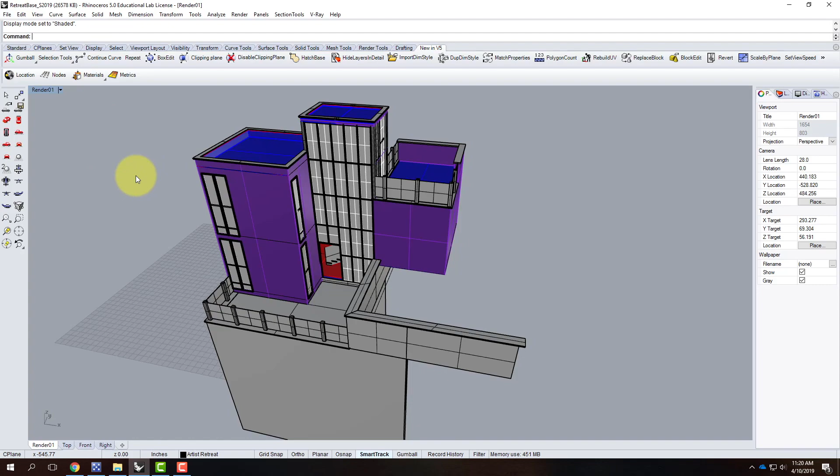So I have my retreat base file here and I've started working on it. I've done this project so that it sits kind of on the side of the hill a little bit, and we're going to think about how this integrates into the building site.

So I have this one ready. I probably could use a little bit more work on my layers, making sure they're nice and clean, but I have attempted to already organize my layers just a bit. I have a master layer called the Artist Retreat, then underneath it I have a variety of other layers, including a default layer, blocks layer, and then interior, exterior, landscape.

This is a window, I think. The pools are turned off. I'll do the pool later on because you always want to know how to render water, so I'll end up doing that a little bit later on. And I should make sure that fountain is off. And I have a construction layer that's just something for me to work on.

So I have spent some time, I've tried to organize it a little bit so it's not too out of hand, and I've gone ahead and I've saved this file.

The next piece is actually creating the site to bring this into. So I'm going to go ahead and minimize this, and I will open a new Rhino. Instead of going in Rhino and saying File Open or File New, I want to keep them both open at the same time, so I'm going to open a brand new Rhino. It's going to be large object inches as my template.

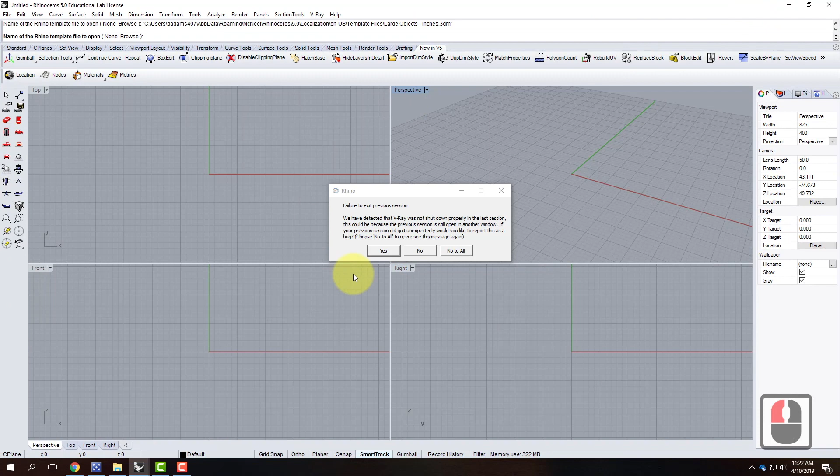At this point, I want to bring in that site information. So I could go into SketchUp and get it, or I could use the site SketchUp file that I already gave you, so I'm going to bring that file in. And this is a bit of repetition, you guys have already done this many times. So I'll go into File and then Import, because I'm going to bring it directly into the scene.

And I will go to my flash drive here. I apologize, I have to remember where I saved this. There it is.

Okay, how many people are doing the ocean? How many people are doing the mountains? All right, so you're about 50-50. I was going to do one over the other because I have to pick right now which one to do. I'll do the ocean, and maybe I'll end up doing both so you guys can see it.

So I've gone ahead and I brought in the ocean file. There it is. Remember, this is a SketchUp mesh file that I brought in. I can delete the little person, I don't need that, and I'm going to spend a little bit of time organizing, just like I've been doing.

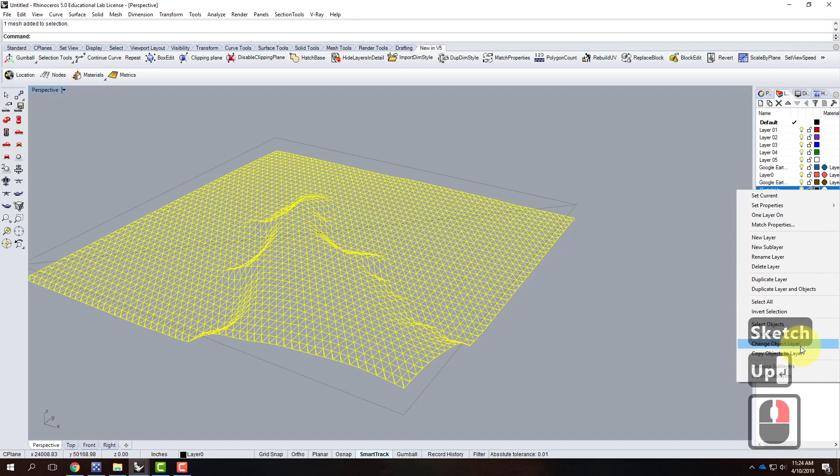I want my original SketchUp mesh to be on a layer called SketchUp, so I'll right-click and say Change Object Layer. I'm also going to keep this file, let me right-click and say Change Object Layer. The reason I want to keep that one is if I switch into rendered mode, I should see the preview of what's going on, and I might use that a little bit later on, or that material a little bit later on, so it's not a bad thing to just keep that around for later. So those are both on the SketchUp layer.

I want to create a new NURB surface because I want to smooth it out a little bit. It's not necessary that you do it, however, the building integration is going to work a lot better if you create the NURB surface ahead of time.

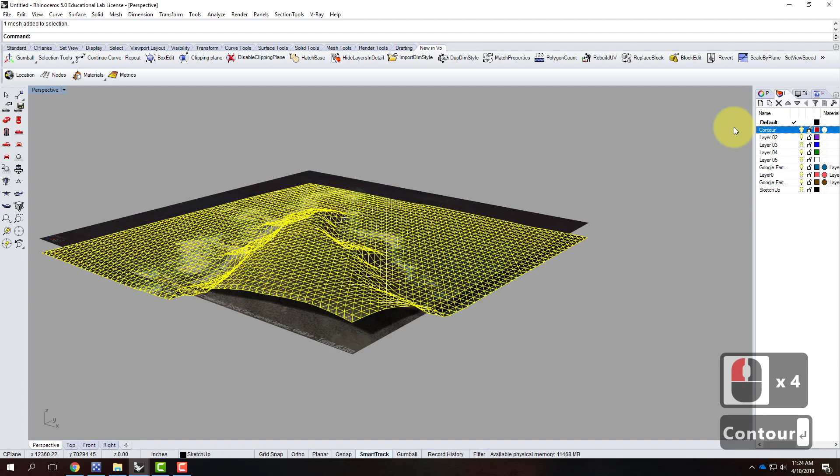So on layer 1 here, I'm going to call this Contour. I could do Contour X and Contour Y, but I'm going to do it all on one layer, I'll call it Contour XY. How about that? I have my mesh here, I'm going to type Contour.

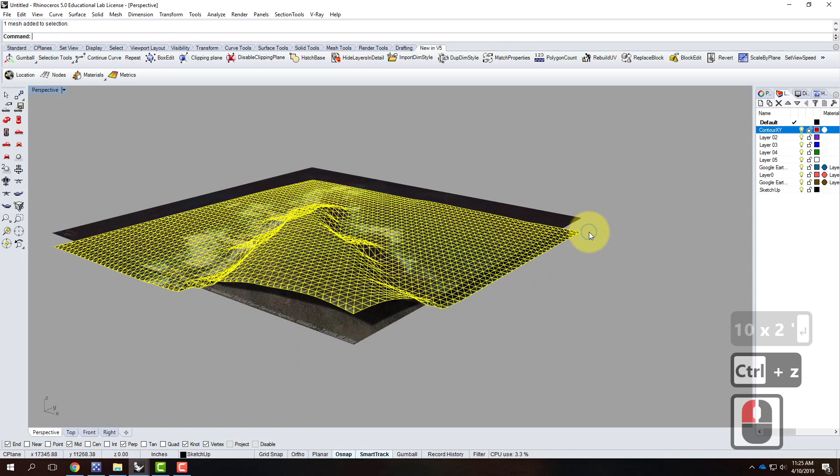I have to turn on my object snap. I'm going to do end, mid, perpendicular, and I'm also going to do knot and vertex because I'm dealing with the mesh here. And we'll do one in this direction at 100 feet. Not as accurate as I'd like, let's do it at 50 feet. There we go, a little bit better.

We'll do this one in that direction at 50 feet as well. There we go. And now I can turn off the SketchUp file altogether, and I'm left with just that mesh. We're going to do the curve network out of this, so let's look at it in the top view and clean up the edges.

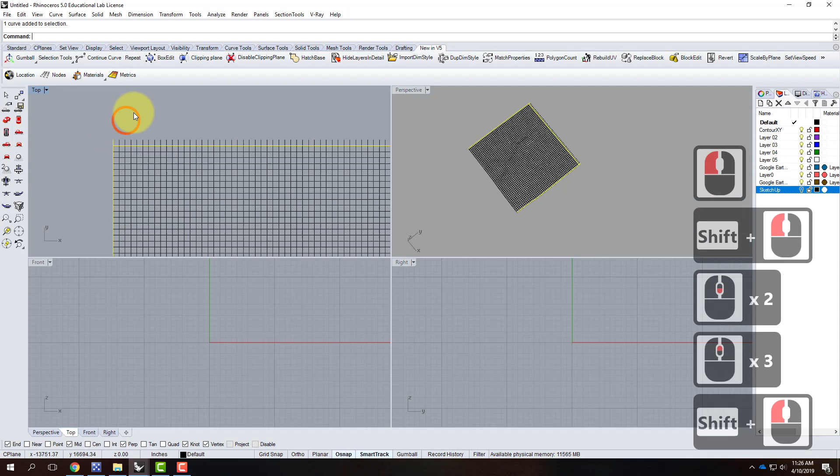So I'm going to trim and get rid of all of those pieces. Oops, too close. Let me make this a little bit bigger. It'll make the selection easier.

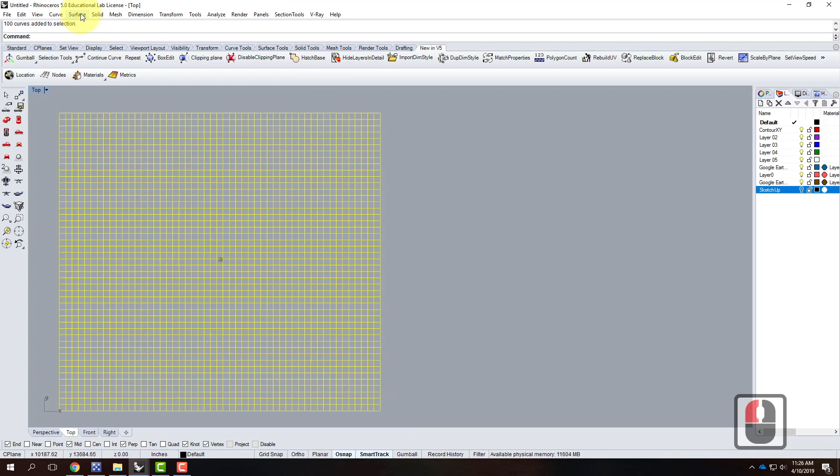All right, so I've trimmed off all those edges. Those look good. I'll now do a curve network of these curves. So I'll select them all and go up to my surface curve network, or I could type networkSRF into the command line. See if I can just skip over those. There we go.

Remember, this process tends to take a little bit of time, so bear with me.

All right, I'm going to deselect. I'll select that black object. I'll type rebuild. And remember, this is somewhere between 200 by 200 and maybe 50 by 50. I'm going to try it at 150 by 150 and see what it looks like.

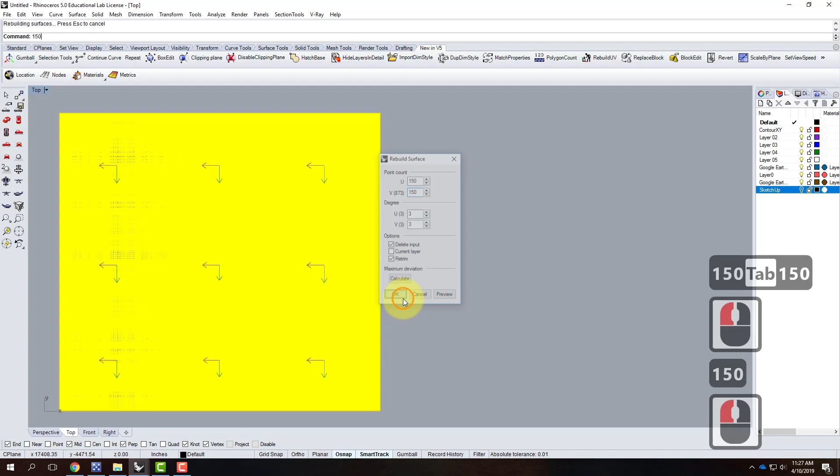And let's put it on its own layer here. And we'll call this terrain.

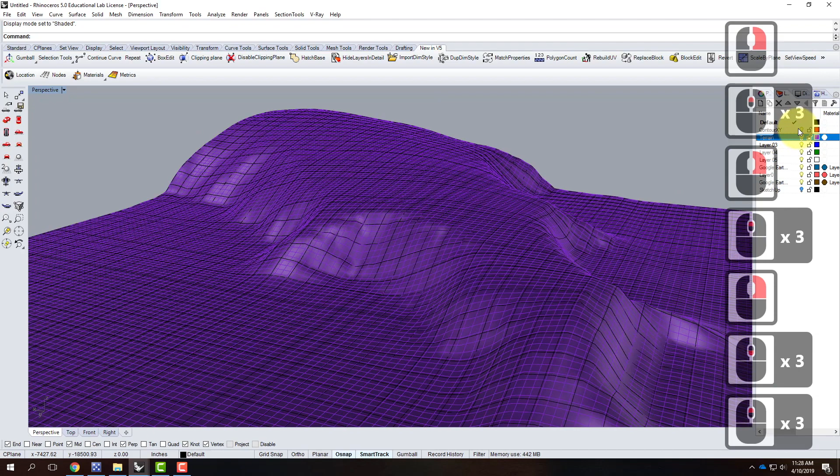I'm going to view this in shaded mode. And there it is. Let me turn off my contour XY. Oh, looks like I never actually put that on its correct layer.

All right, so if we look at this, it's reasonably smooth. Maybe 125 by 125. And I'll say OK. All right, that looks pretty good.

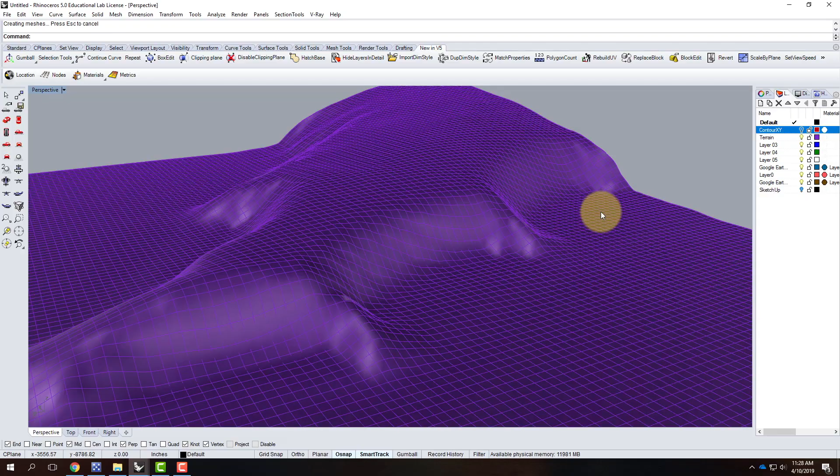So I have my terrain set up. Now it's going to be time to bring in that block of my building. And we're going to keep working with this, and I'm going to add the ocean and whatever so that we can get there. But I need to think about where my building really belongs.

And of course, being familiar with the site, I've already kind of picked out where I think the building belongs. For you guys, it may take a little bit of time to sort out where that building belongs. I'm going to try to nestle it right into about there. I could also nestle it right into about there. The orientation works pretty well.

So I'm going to go ahead and let's save this before I move on. I'm going to go to File and Save. And I have a folder set up for my artist's retreat. And this is going to be the master site. And this is the spring of 2019. And I'll go ahead and click on Save.

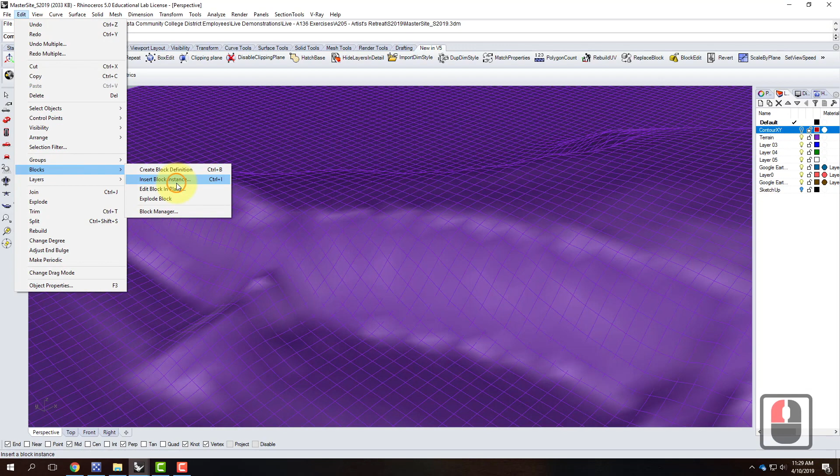There we go. Then I'll go to Edit, Blocks, Insert Block Instance. And I'm going to go find that... I need to be looking for the retreat base. I'm going to then drop that one in as a block reference.

A couple things that are important here. These are all fine, we'll go ahead and say OK. But here, we want to make sure that we're linking it and that it's a reference layer style, because we want to be able to update it and we want to make sure that it's not weighing down this file too much. So we'll go ahead and link it as a reference file. We'll go ahead and say OK.

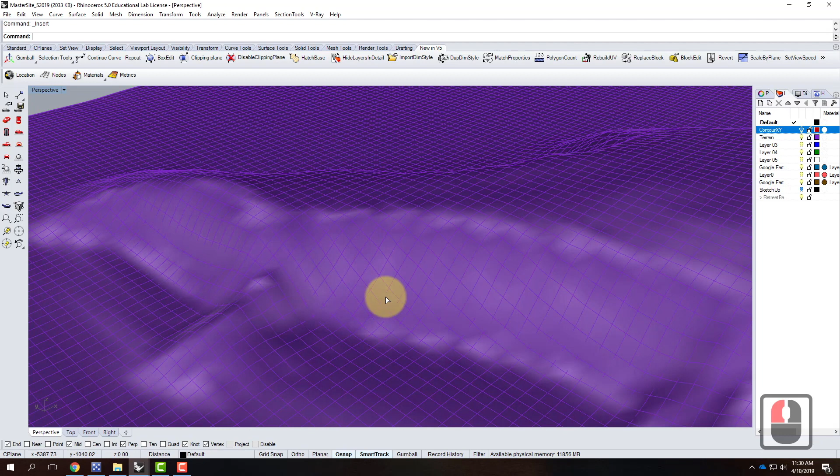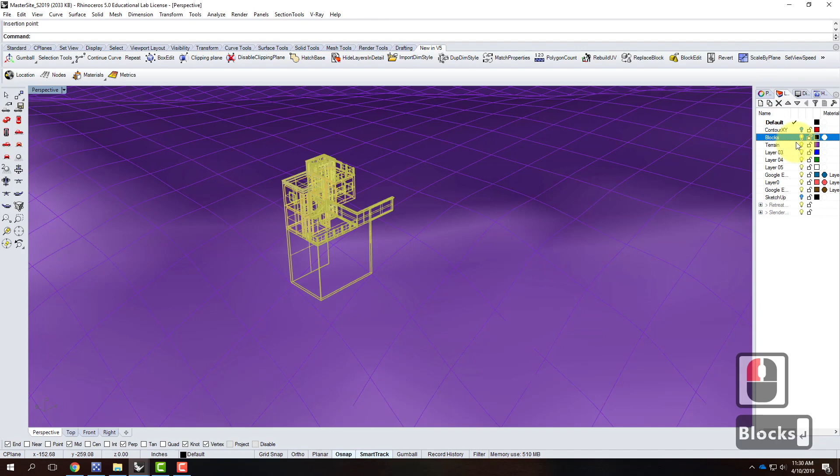We can see here that it's creating the retreat base right there. And the other thing about this is that when Rhino creates a block, so there it is, the block exists as an object independent of the objects that are contained within the block. So it doesn't hurt to give yourself a layer called blocks, and then take this object and put it on the blocks layer. That way you have control over the block.

At least I thought we did. It's just low. So we need to move this and start to manipulate it so that we can get it into our correct position. So sometimes it's better to look at it in the top view and turn the shaded mode on, because you can kind of look down and see where it sort of belongs.

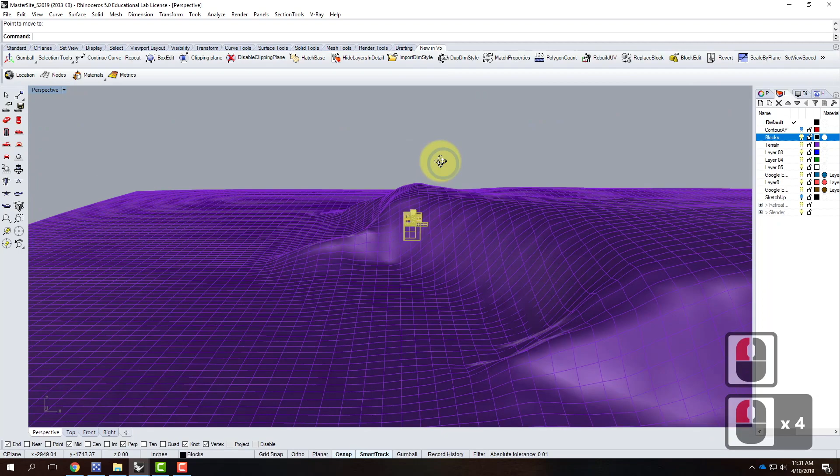I'm going to move that over. Maybe right about in there, maybe a little bit over in here, something like that from a positioning standpoint. That can be easier than trying to do it in the 3D view. Then I need to move that V for vertical, and I'm going to pull it up.

And I may have pulled it a little bit far. Move it, V for vertical. I'm going to turn off all my snaps here for a second to make it a little bit easier. And you can kind of see as I'm coming down, it's starting to integrate into the site. If I get to a certain point, right about there, okay, that's not too bad. I'm going to hit escape and look at it and say, okay, that's hitting about where I want it to.

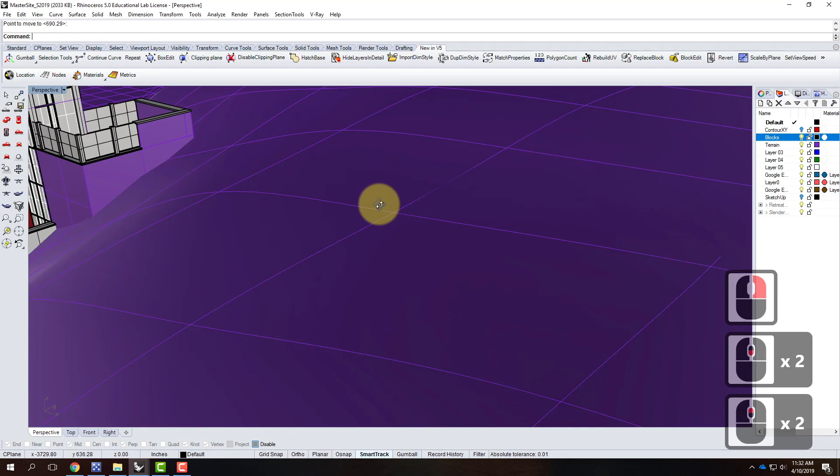I'm not intersecting any of the windows. I've got some issues, and obviously the slope is going right through the building in certain parts, but that feels pretty good. That's close to where I want it to go. This I envisioned as a little bit of a retaining wall, so I'm okay with that placement. If I zoom out a little bit, does that feel like it's about where I want it to be on the coast?

Yeah, it's about right. So now that I have the block in place here, I need to actually cut out the terrain for the block, and I also need to modify part of the terrain, like this retaining wall section here. So we'll start by cutting out the terrain.

Let me clean up my layers a little bit. We'll keep the SketchUp layer here. I'm going to get rid of all these other layers. Oh, darn Susan, she's on layer 0. I've got to get rid of her.

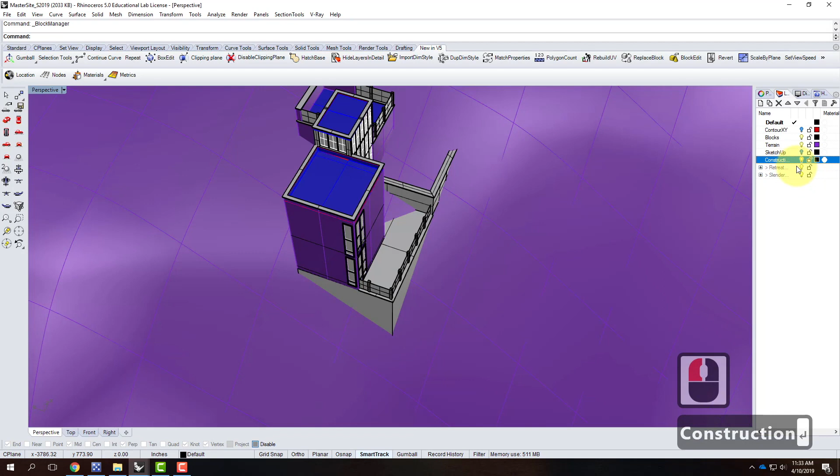We go into my block manager. Let's get rid of Susan. There you go, she's gone. Now I should be able to get rid of layer 0. There we go. Okay, and I'll give myself a construction layer. This is just a temporary layer. I could actually just keep using the default layer.

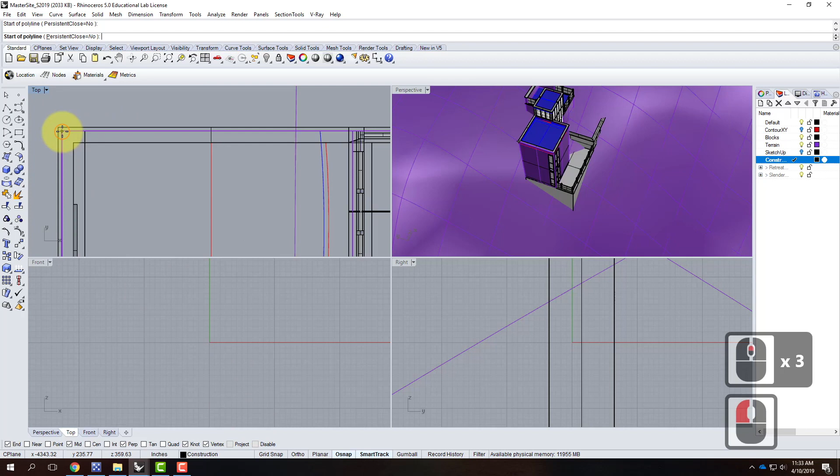And what I'm going to do is I'm going to use a polyline. In the top view, let me switch back to wireframe mode. I'm going to trace over the outline of my building. So I'll start, let me turn back on my snaps here, and I'll start there, and I'll work my way around the building. My walls are the purple lines, so I can use that to my advantage because I can trace right over the purple.

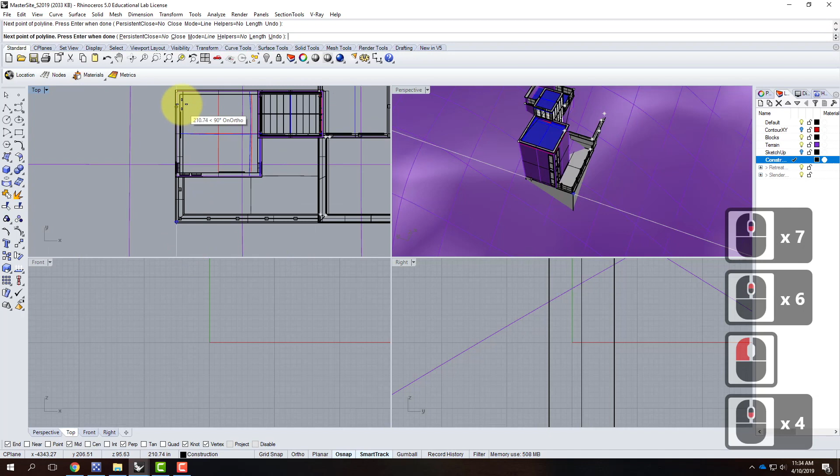But I do want it to accommodate this. Go that to right about there. Whoops. All right, and then I'll go ahead and type C to close it, and I've now created a curve that is the outline of my building. So if I look down on it there, it's not the most accurate because it goes up and down and whatever, but it's still the outline of my building.

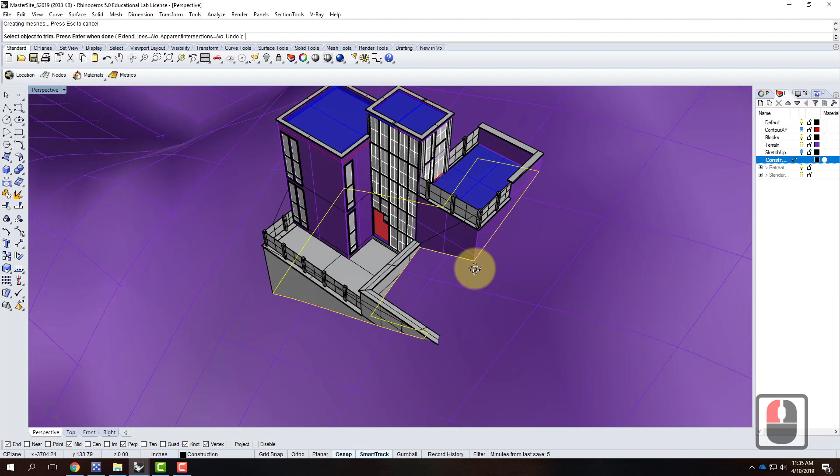So if I work on it in the top view, and I type project, and I project that line onto my surface right here, it creates a perfect outline for what I need to cut out of the terrain. So we'll go ahead and use the trim tool now to remove that part of the building. I was careful and I didn't remove too much of the terrain back over in here because I wasn't quite sure where that was going to end, and I didn't want to cut out too much up here.

So it's now in the building. If I were to jump inside the building here, I don't have terrain running through my building, so that's good. It's sunk in the correct way, but I'd like to integrate this part of the building just a little bit better into that hillside. I envision this flattening out just a little bit. So we'll take a little bit more to adjust it.

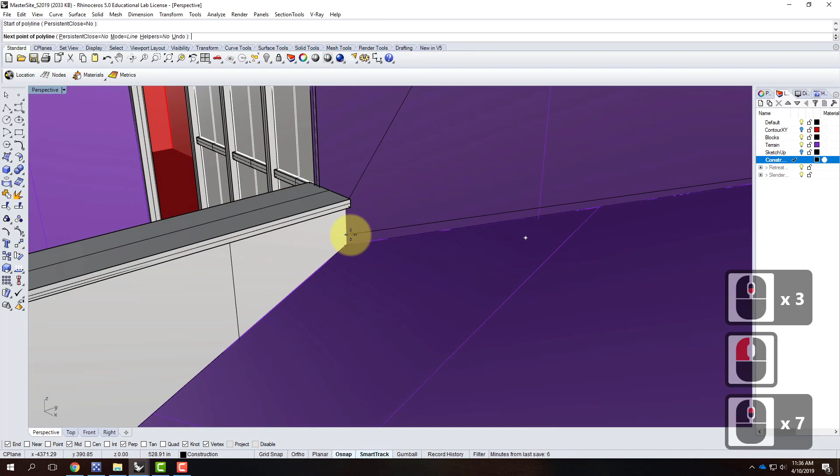And I'm going to start here, and I'm going to go to right there. Ideally, I would go down about 4 feet. And maybe I'll draw that in first. Let me start right there. And I'm going to type 4 feet.

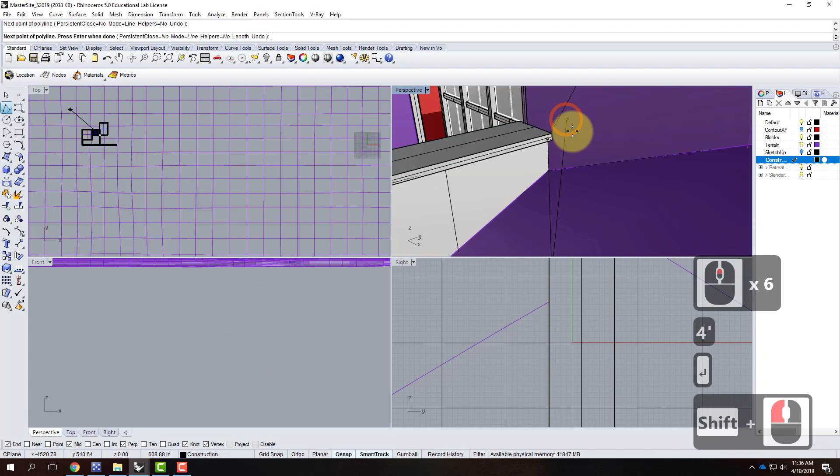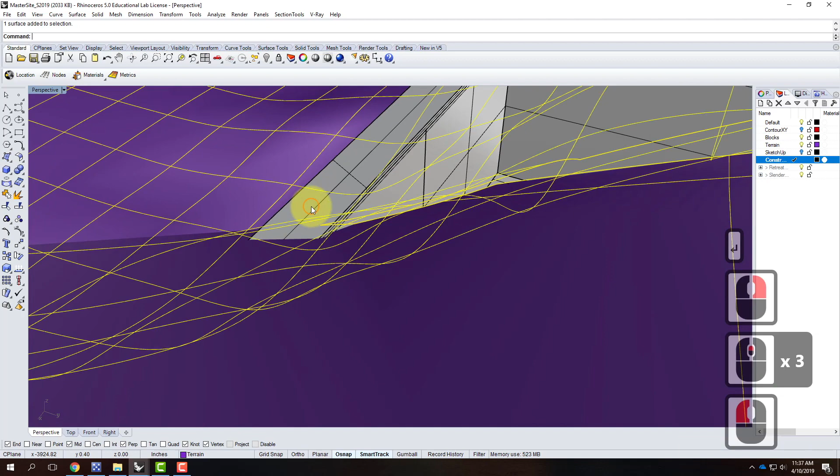All that's doing is it's giving me a reference point for where I want the terrain to fall eventually. And so we'll go ahead and go from here to there. And I'd like to know where this surface intersects with my wall. It's obviously intersecting. Actually, better yet, I'd like to know where this intersects with my wall. So I'm going to take this curve and this surface, and I'm going to type intersect.

And it's going to give me a point where the two intersect. I can then draw a line from that point. I turn on point snap there, up to that point right there.

This line here doesn't follow the surface. It's close, but not quite. So I'm going to need to project that onto the surface. So I'll come back here and type project onto that surface. And there it is.

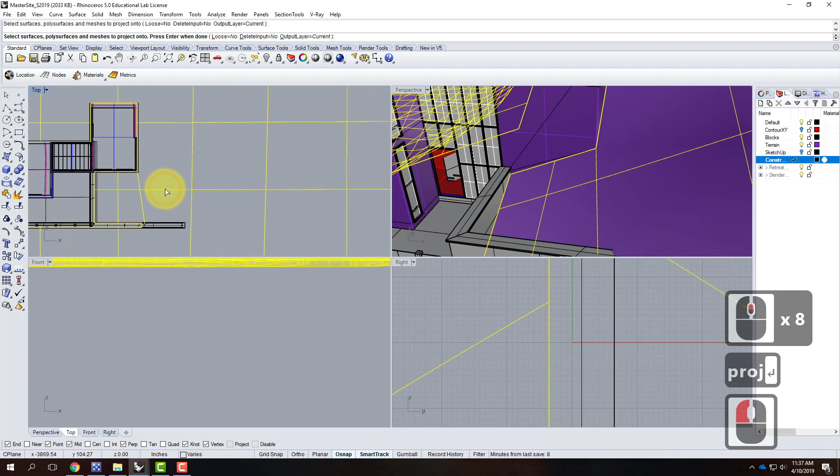So this line plus that line plus this line there are close to what I need for a curve network to create this little bit of surface. I need to do a little bit of modification. Let me go to trim and get rid of that extra piece of the line.

Nope. Do it from underneath. Get rid of that extra piece of the line. I also need to get rid of that little stub piece right there. OK, I'll hit enter to finish, explode.

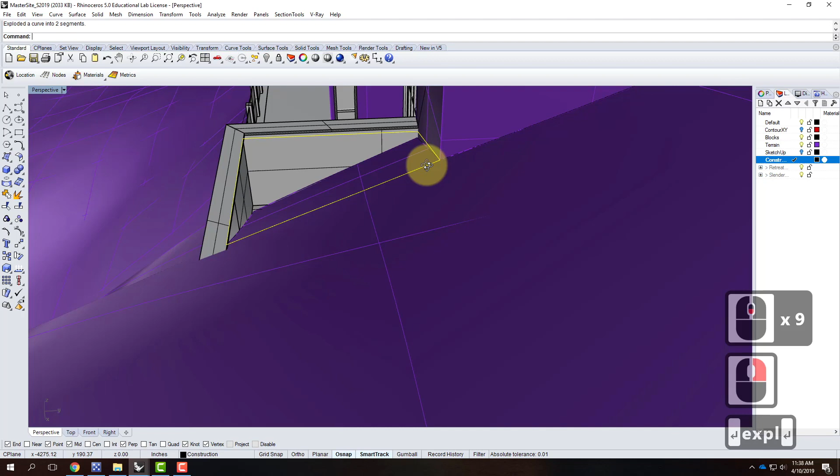So there's 4 separate line segments. And then I can go up to the surface curve network. And that's going to build that piece of the surface. It's going to match in perfectly with this edge, because I made the transition along that edge. And then I flatten it out to fill in that piece of the surface there.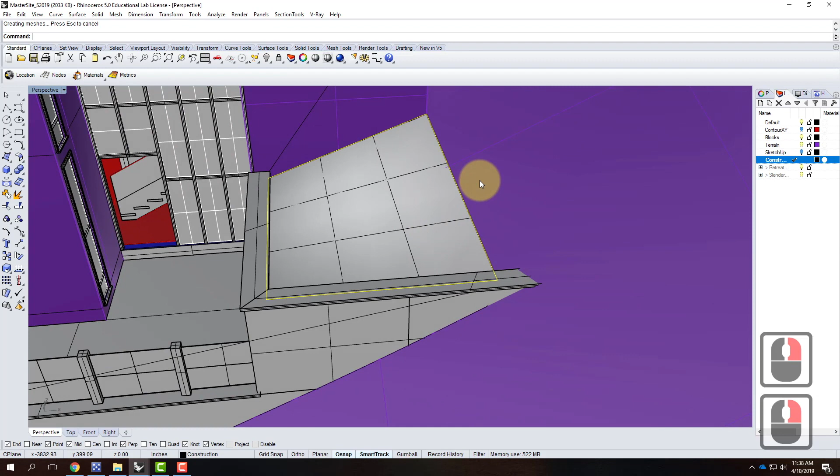If I wanted to, I could actually trim off the purple surface that's underneath. Right now I have redundant purple surface there. I can go into the top view. I can project down onto the purple surface.

And then I could trim that piece of the purple surface away. Like that. It doesn't really matter, except that now I can take these 2 pieces and actually join them together, which can help in the texture mapping a little bit.

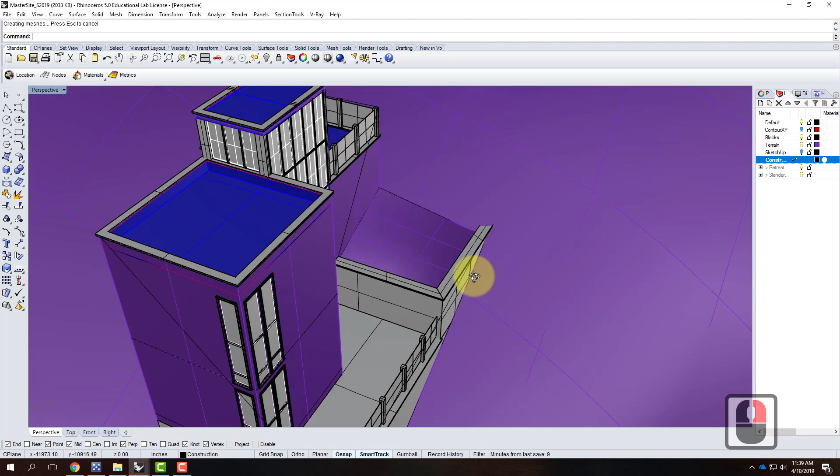So I've just made that little bit of a modification to allow those to flow in together. And basically, this is starting to feel like it belongs in the scene as part of the site. So that's good. So I have this in. This is still all a block reference. So I haven't done anything.

Now, for me, obviously, I've pulled this into the site before. I've spent some time figuring it out. When you go to pull yours in, you may find that you need bigger foundation to be able to put this one in. Or a retaining wall might need to get longer.

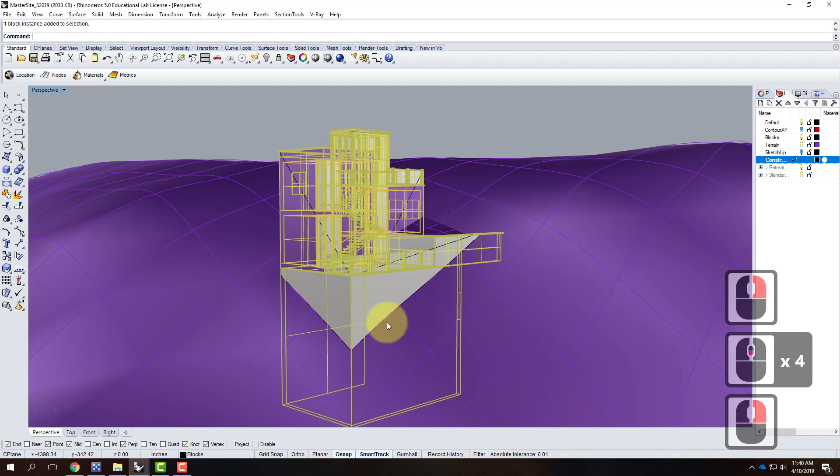Now, if you're working up on the top of the site where it's relatively flat, you don't have to do too much. But you're still going to have to work a little bit with the foundation. So if you find that something wasn't quite long enough, you see that I made the foundation way more than deep enough as it goes through. But if it wasn't quite deep enough, you can jump back over into this file and you can make modifications.

So let's say that, hold on, I have to turn on my object snap here. For argument's sake, let's say that I hadn't done this before and that my foundation wasn't big enough. I'll save this.

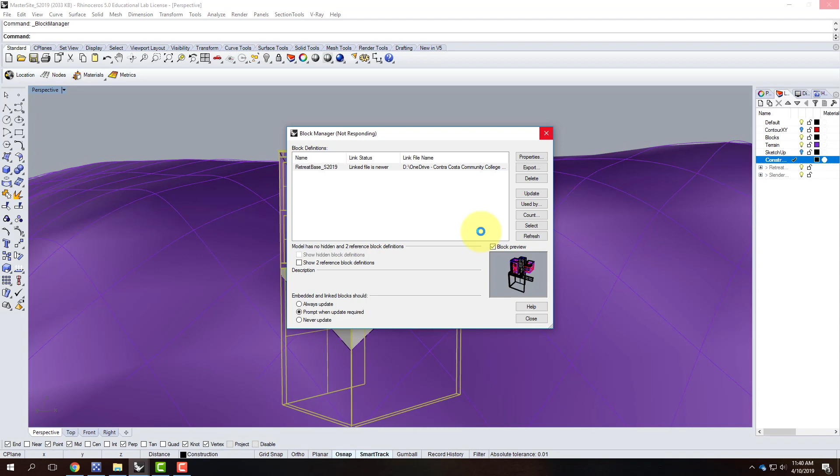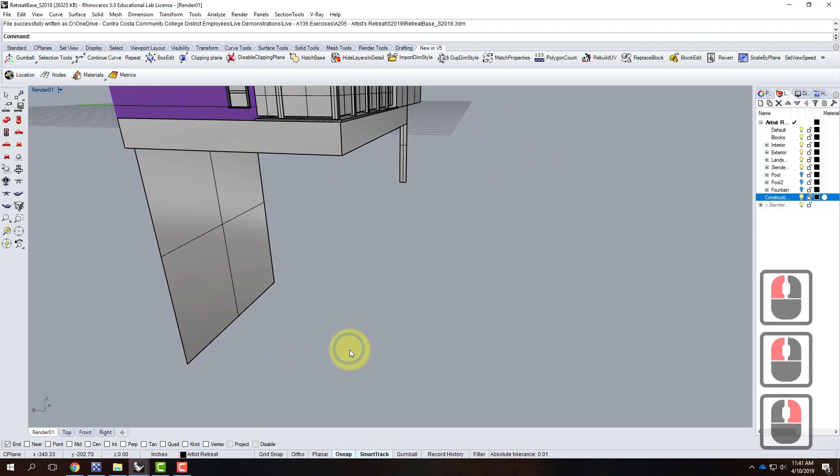Hold on a second, has to update. Okay, so there it is. I didn't have it extended down far enough, and I needed that to extend. In this scenario, I would go back to my file here, and I would extend that piece of foundation down so that it would more than be enough to go through my scene.

So let me go ahead and scale 1D on it. And I'll drop this one down so that's more than enough, and I'll go to File and then Save. I can then jump back over into this file, and I can update my block, Edit, Blocks, Block Manager, and we can go ahead and update that file.

So that's how to add the building and site integration. That's step or part 1 and part 2. Part 3 talks about exterior geometry. That's essentially what I was just doing, where I need this retaining wall to be a little bit longer. I need something to be stretched a little bit. Those are the modifications that you're going to need.

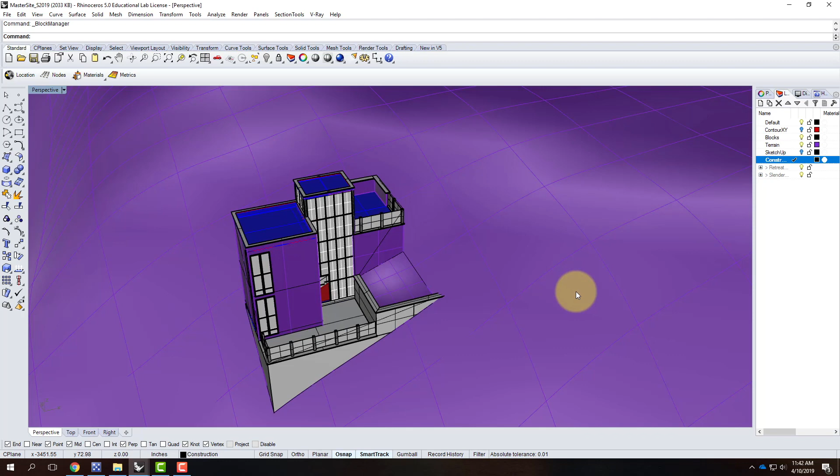Buildings always have foundations, and ground is never perfectly flat. It's just the way life is. There's always a slope to any site. So that being said, you're going to have to make a few modifications. Give yourself a little bit of extra space, extra depth where necessary.

Okay, so the next part is starting to establish where are the views going to be? Where do I want to make my renderings? And so as I'm looking at this particular building, doing a rendering from back here, looking at that, it's not the most exciting part of my building. The truth is, the fun part of my building is looking toward this side. So as I start to establish my view, I'm going to want to set up a rendering that's somewhere in that neighborhood. Now, when we start talking about views, we might want to get a little bit more specific.

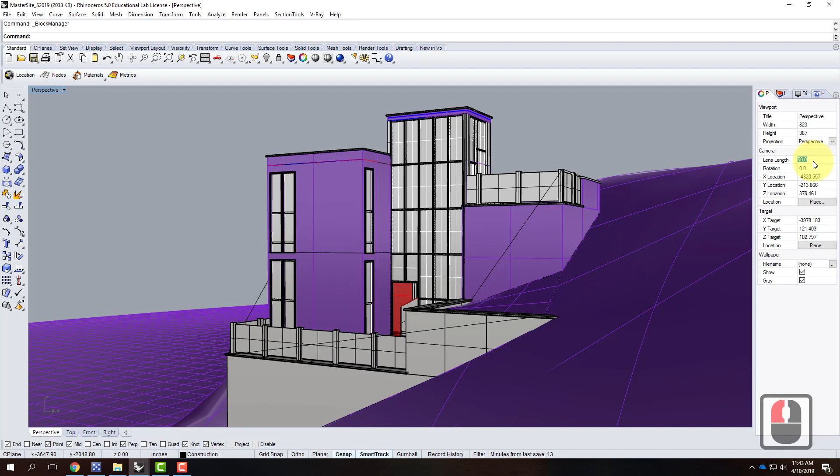In this scenario, the default view is a 50mm camera lens, which is kind of a telephoto lens. We're not going to get too much distortion around the edges, but we're also not going to get too wide of a view. If nothing is selected in my master site file, I can go to Properties and look under Camera, and it tells me the lens length is currently at 50. I can change that lens length down to make it a little wider, say maybe 28, and this is going to feel a little more dramatic. It's a subtle change, but it's a little bit of a different change.

If you go to do an interior rendering, which we're going to do, you might even switch it all the way down to like an 18, which is really wide. You can see it there at 18, it starts to distort pieces of the building. We could go even wider than that, down to maybe 10, and it's going to be real distorted when we start to get in close. That's going to work nicely for an interior rendering.

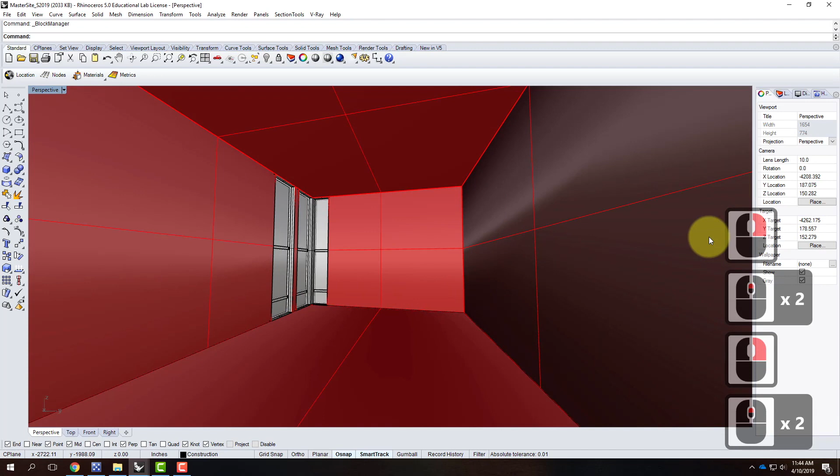If I jumped inside and wanted to see everything going on in a particular room, you're going to want a wider angle. Even 10 is a little bit much for me. I tend to stick to about 18 for an interior.

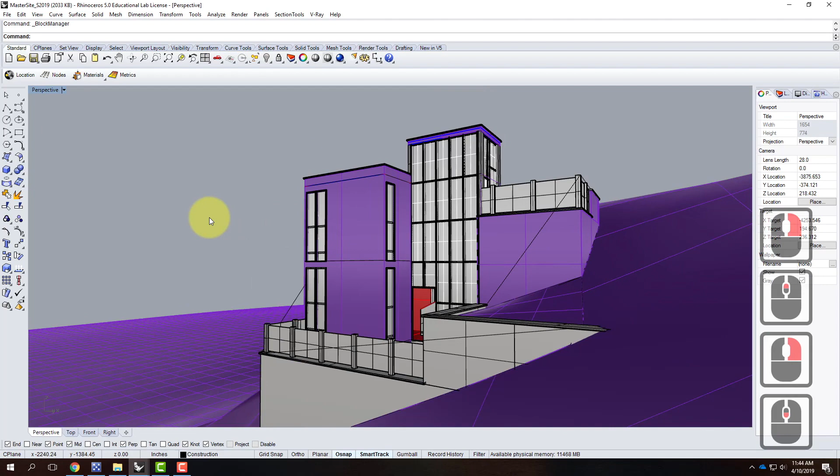So when we jump outside, though, I think 28 is not too bad. So I'm going to go to 28, and then I'm going to start to really align my view, and start to feel like, okay, I'm liking this. Maybe I want it to be a little bit more like that.

Remember, I can use the pan tool as well if I start to think, okay, I want to cut that part of my building off. I want to look that way because all I want to see is ocean out here and a little bit of grass right there.

Okay, maybe this is the right view. Do I like having this part of the building cut off? Not really. Let me pan and pull that down ever so slightly. There you go, I'm feeling like I've got this set up. This is the way I want it. The angle's right. This is going to be a good rendering.

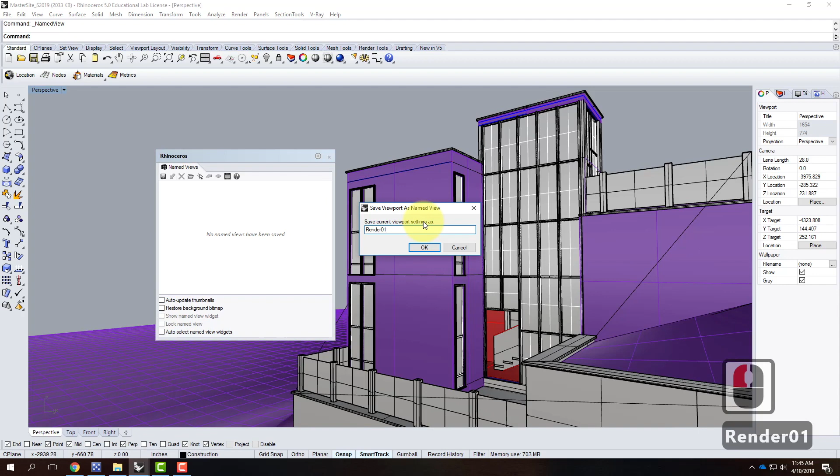Now it's time to save that rendering. We've done this a little bit before, but I'm going to emphasize this even more now. We're going to go to the downward facing triangle and go to Set View, Named Views. Before I ever perform a rendering, I want to save the view. So this is going to be Render 1. I'd encourage you not to put any spaces in these names, so keep it without spaces. I'm going to call this one Render 1. It could be Exterior Render 1 or something along those lines.

The advantage of saving these rendered views is you can keep modifying and then jump back to the exact view and do the same rendering. You don't have to waste time finding that render view anymore. So I have that view established.

I might also spend some time and play around with a few other views. Maybe I want to be as if I'm standing on top of the hill looking down at the building. Maybe that's a view I want to try to see, or look at it more. Yeah, maybe it needs to be looking down on the building, something like that.

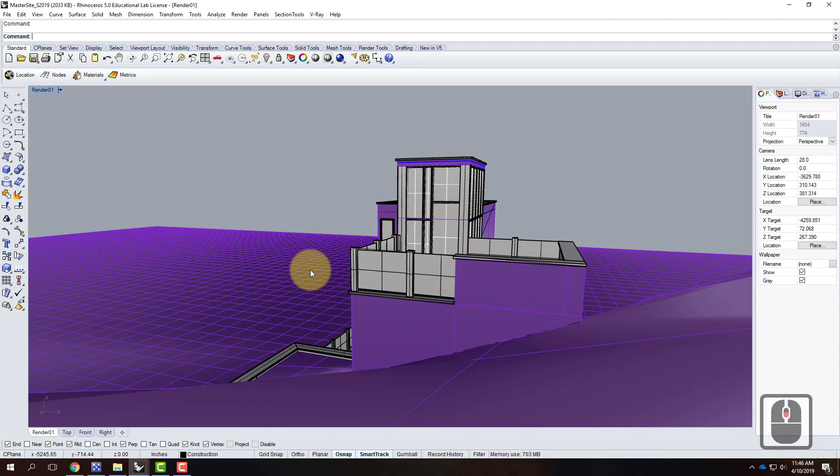We can get more technical if we want, in that we can show the camera itself. I can click on this downward facing arrow, go to Set Camera, and turn on the Show Camera icon here. Now when I do that, nothing happens in this view, but the camera shows up in all the other views. So you can actually see the placement of the camera itself, and you can see the target, which is the middle one, as to what it's looking at.

If I were to move that camera point, let me type move here. See how the camera angle changes in the render 1 view? I can manipulate the camera independent of the view. I can zoom, pan, and dolly inside the view itself, but I can also manipulate the target of the camera in an external view.

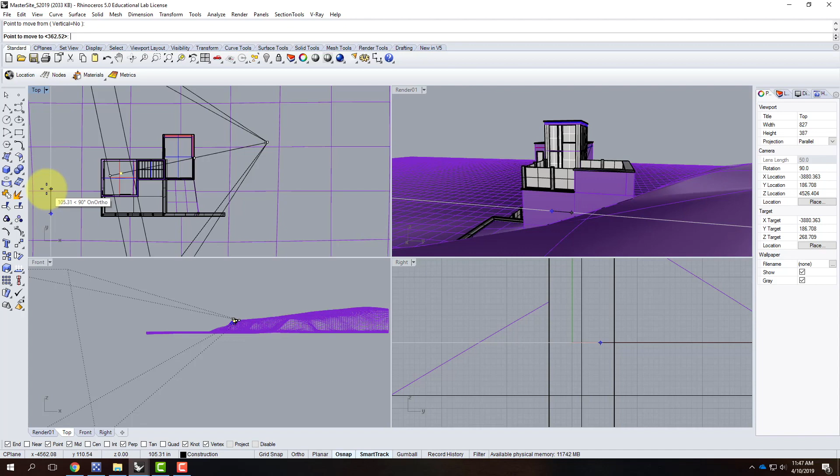Frequently you'll end up doing this. We'll do this more in depth when we do the interior, because we're going to set the height of the camera to eye level so we're looking at it in the correct orientation. So this might be my render 2 view, for example, in which case I go to the little downward triangle, go to set view, named views, and this would become render 2.

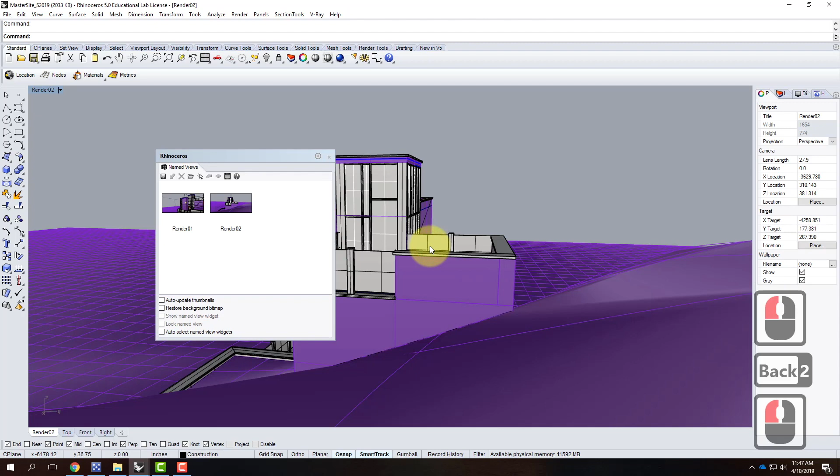I strongly encourage you to save these rendered views, because then you can go back and re-render as you make modifications. You change the texture mapping, you go back and re-render. Change the lighting settings, you go back and re-render. Once you have those views, it makes it really easy.

So that's setting up the ideal view. The next part, part 5, is setting up the HDRI environment for your file. Remember, we did that, we have to do that one again. At this point in the semester, I'm not expecting you to do it completely from scratch. I taught you that part of it, but we can use the presets. If you go to V-Ray Resources and then the V-Ray Quick Rendering Setups, you could use any one of these.

When you're doing your renderings, the day scenes are the day scenes. The sunsets and the nights are kind of the same. You could argue that if it's a sunset but the sun's above the horizon, it's a day view, and if it's below the horizon, it's a night view. Making your arguments for you - anyway, you guys can figure it out. Stay away from the night views right now.

I'm going to use the Malibu Overlook view because it has an ocean in it, which is particularly useful in this view. I think I'll flip over and do the Tahoe another day so you guys can see me work on both files. Anyway, I'm going to go ahead and download this.

I already have it there. This is all the information you need. This visopt file will allow me to load it. I also have this one already downloaded. If you want to save this, right-click on it and say Save Link As, and make sure you save it as a visopt file. So let's go ahead and load that one in.

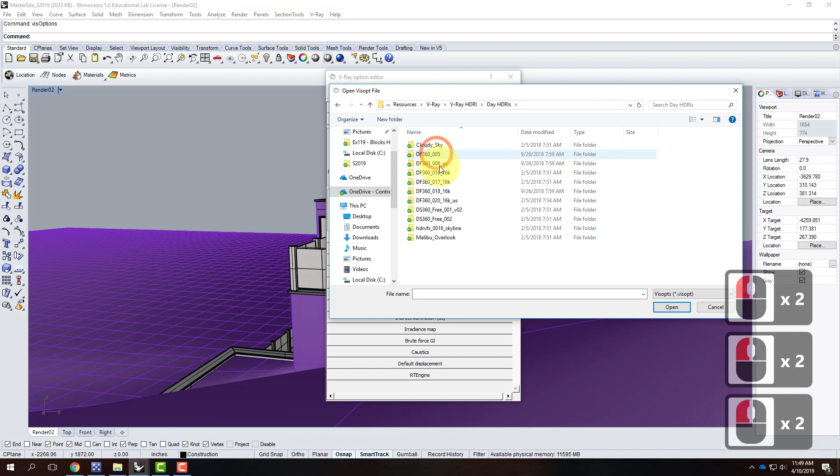I'll go into my flash drive, into my resources, into V-Ray, into my V-Ray HDRI. These are day HDRIs, and I have the Malibu Overlook and the visopt file for it. We'll say open. The reason I open one of the drawers is once it's done loading, it will close the drawer, and that way I know it's done with its load. Okay, so I have that one inserted in.

I need to double check that the settings are correct. I'll go into the GI skylight, click on the map button, and make sure this file is where it's supposed to be. Looks like it's not, so let's go into my resources, into V-Ray, HDRI - and you can see why organization is important here, so I can easily go back and find it. There's the ENV file. Let's make sure we get that.

Perfect, so those two are installed. That's good. That means I have my environment.

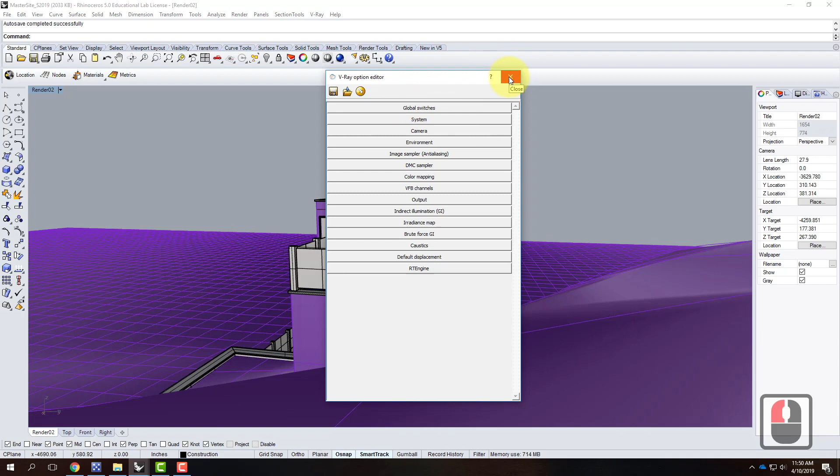I still need my sun installed. So I'm going to create a layer for environment and a sublayer for sun. There it is - I have environment, I have sun. On the sun layer, I'm going to create a V-Ray sun.

I should have loaded the V-Ray toolbars by now, so let me go ahead and load those real quick. Let me go to my toolbar layout, go to File and then Open. I have this on my flash drive for easy access. There it is. Perfect, now I can choose the V-Ray Sun right here.

We'll uncheck Manual Control, and I want this to match up with the settings that I have listed on the website. So I'll double check here: my sun settings are San Francisco on 6/15 at 2:45 with daylight savings on.

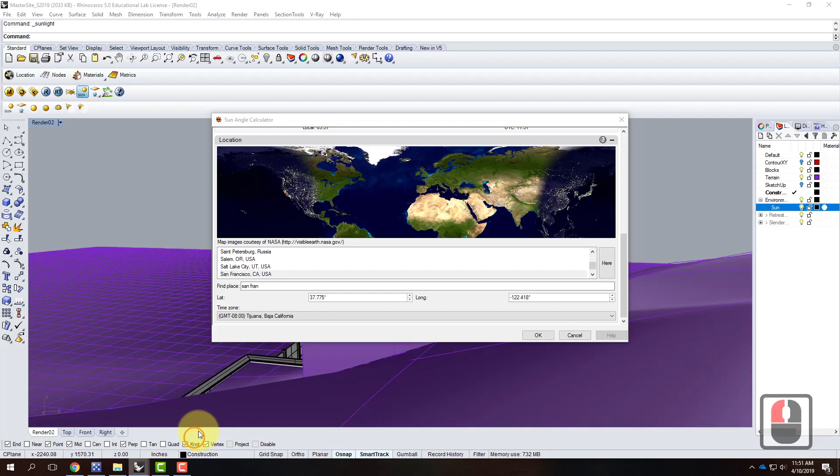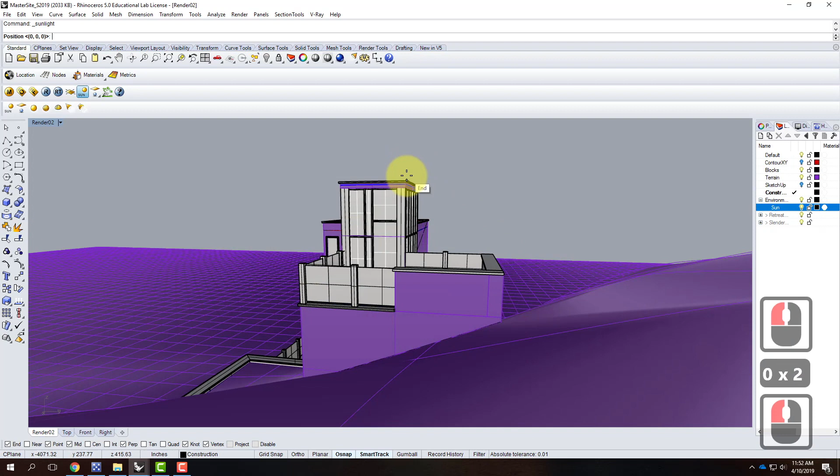So there we are. This was 6/15, daylight savings was on, and it was at 2:45. Seconds don't really matter, we'll go ahead and say OK. Remember, I have to put this into my scene. There's the sun, it's in the scene. I want to make sure it's on the sun layer, so let me change object layer. There it is, so I have the sun, I have the environment installed. I'm getting close.

Next pieces of the puzzle are obviously assigning appropriate materials and texture mapping. You guys don't need to watch me do that, I think you're well accomplished at that by now. Those materials would be assigned not in the master site, but in the retreat base. So I can flip this over into rendered mode, and we can see that the materials are ready to go on the building. Let me jump back over into the master site. So I have the materials done.

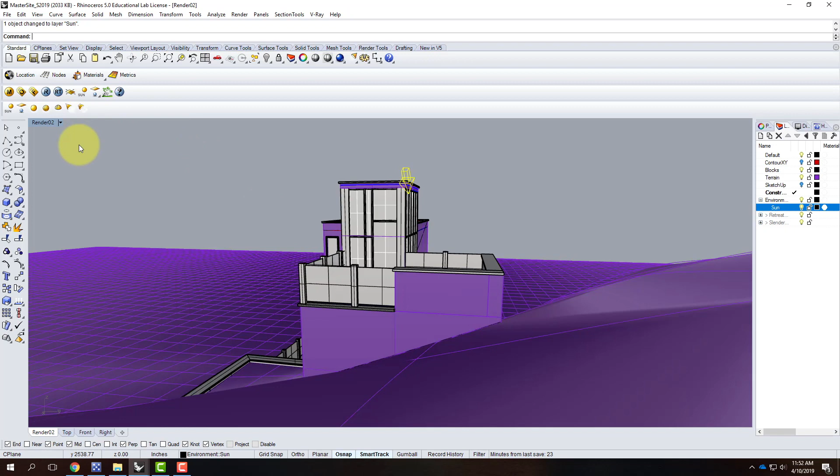The other thing that comes in here is sometimes you want extra objects that enhance the overall rendering. These are the kinds of things that, if you're proficient and good at Photoshop, you could very easily Photoshop in, and they'd probably take you a lot less time than to actually render them.

What I like to tell people about rendering is, theoretically in V-Ray you could render the perfect scene, you could have every blade of grass, you could render it perfect. That would take you, let's say, 100% of your time to do it. If you did Photoshop, you could basically spend 100% of your time in Photoshop and get a pretty good rendering. Or you could spend 50% of that time and do a combination of V-Ray and Photoshop. So you can cut down on the amount of time it takes to create the perfect rendering just by meshing Photoshop and V-Ray. This isn't a Photoshop class, so I'm not going to teach you that part. I'm going to teach you the V-Ray part, but recognize that collaging in, using the grass clone stamp and that sort of thing, is a really good strategy versus actually rendering it out.

So in this particular scene, I don't have an ocean and I don't have any grass just yet. And I'm noticing here that when I added those V-Ray toolbars, it tweaked my view just a little bit. So I'm going to go back and reset that view. Let me go to named views, I'm going to rename this one as render 1. Now, I've been very careful as I set up my view - the only piece of grass that I'm going to see is right there, and it's close up, so I can deal with that piece of grass and not the rest of the grass. So I'm being careful about how I set it up.

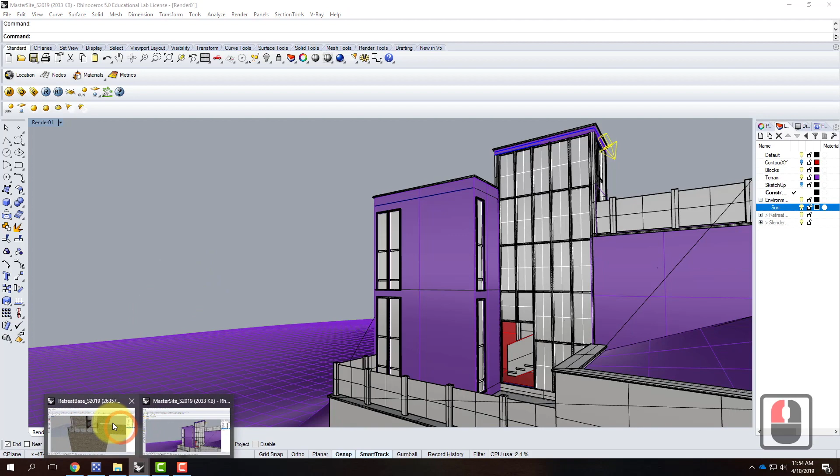I do, however, see a lot of ocean. So for you guys that are doing the ocean file, I have on the course website some stuff to help you out. If you go to Resources and go to the Rhino Blocks library, and into Landscape, these are the things I have set up for you. I have an ocean file that will bring in what I use as the ocean, and I'll show you that in just a second. I have some grass, I have some rocks. I also, for those of you working in Lake Tahoe, have a Lake Tahoe file. It's not perfect - it's hard to render the mountains of Lake Tahoe perfectly, but it's close. It's a pretty heavy file, so you'll want to bring it in as a block. So you'll have your master site, but this will come in as a block. I'll do a sample with this in it so you guys can see that as part of it.

So I need the ocean. I'll click on the ocean, I'm going to download the Ocean 3DM Rhino block - I already have. There is also an ocean material package that you'll want to have as well. Those are both available there for you to use. So now it's time to bring in that ocean. I'm going to make the blocks layer active here. I'll go to File, then Edit, Blocks, Insert Block Instance. And I need to go find the ocean file, which should be in my Resources folder inside of Rhino, Rhino Blocks, Landscape. There it is - there's the ocean.

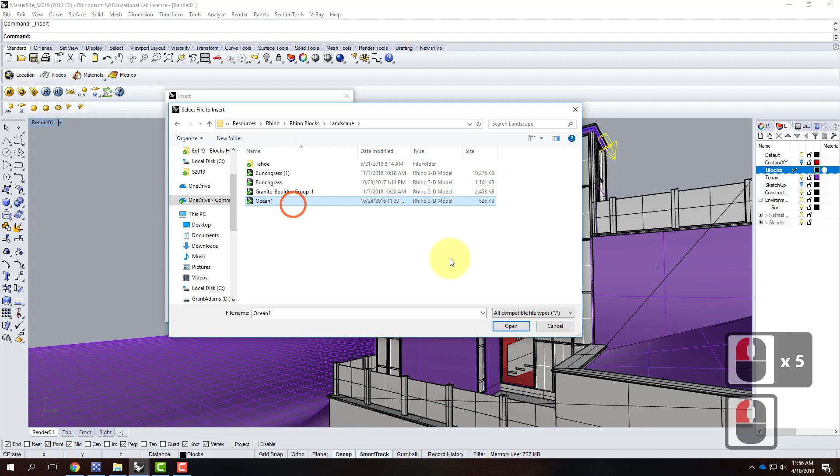And I'll go ahead and say OK. This is again going to be a link and a reference. I'll say OK, and I'll drop this file in.

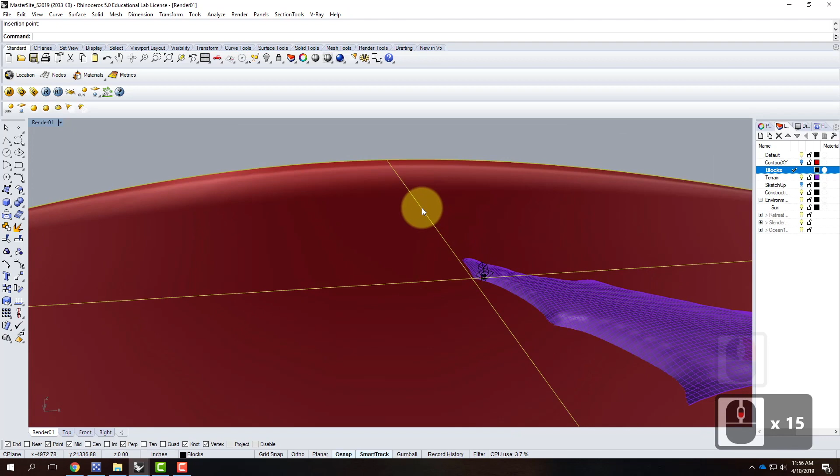What this is, because V-Ray does not support rendering infinite planes with displacement mapping on them, which would be the waves, this is a giant disk. It's kind of like a dinner plate, and it has slightly curled edges so that we can adjust where that horizon is going to be.

First thing I need to do is place it so that it falls where the coast should fall. I'm going to move it, and then V for vertical, and drop it down until it hits right about where the beach would be, right about there. So I've dropped that file in.

You'll notice that if I jump back to my render 1 view, that then provides my horizon.

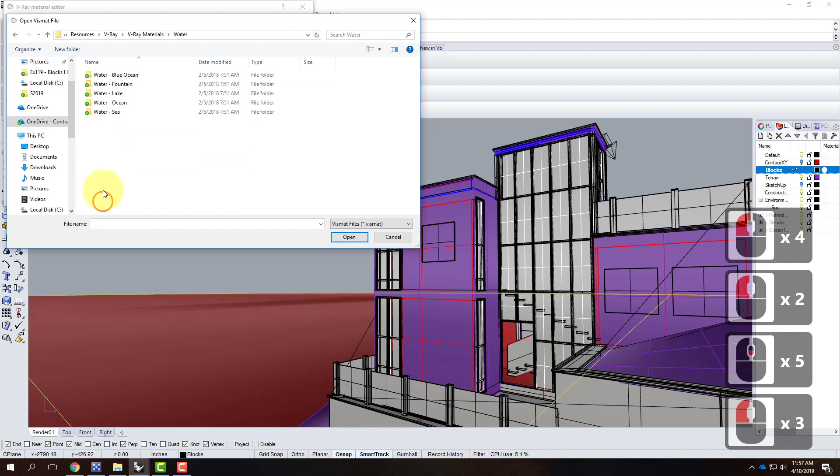I need to make sure that this has the correct material assigned to it. So let me go to V-Ray Materials and make sure my ocean is here. There it is, I'm going to preview it. It looks pretty good. I'm going to go ahead and reload the ocean just to make sure, and import the material. Perfect, all right, just making sure that that's there.

So everything's starting to get set up. If I wanted the grass to go here, the grass is another little block that comes in. It's a series of curved planes that have a grass texture applied to them. The grass is tall, kind of tall grass, and it looks pretty good if you look at it from the side. If you look at it from the top, it's going to look really lame. So looking at it from the side kind of cheats the rendering a little bit.

So I'll go to Edit, Blocks, Insert Block Instance. And there's my bunch grass. Go ahead and say OK. It's again going to be a link and a reference, and I'm going to drop it in right about there.

Adjust its placement in the top view here, and so we'll move it just a little bit.

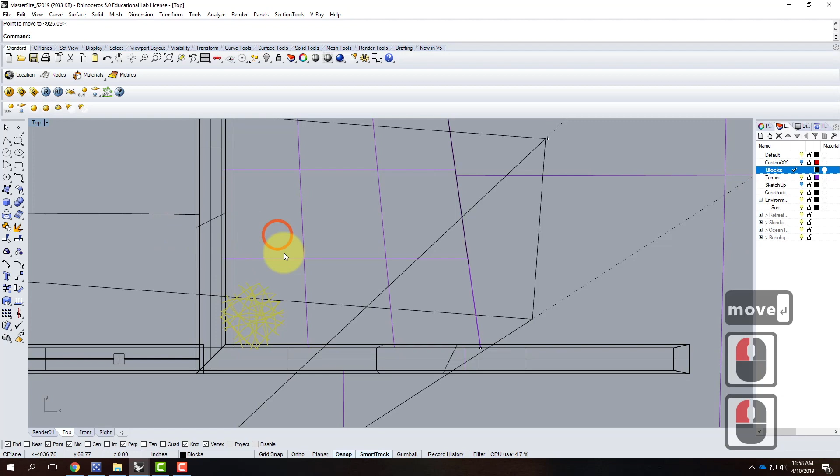Now for this to work, I need lots of them, so I could array these on a surface. Let me take this and explode it so that I have just the small piece of surface right there, and do an ArraySrf. Base point for objects on the array will go right there at the center. Reference normal for objects, it's going to be the default, I believe, so I'll just hit Enter.

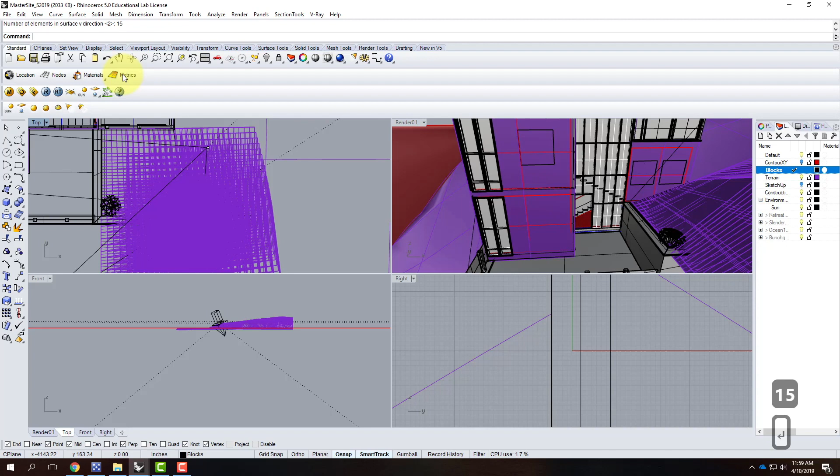Select target surface for array—there's my target surface. Number of elements in one direction, this is a guess, maybe 15. Number of elements in the other direction, let's try another 15. And that was wrong, I selected the surface instead. So let's try that one more time.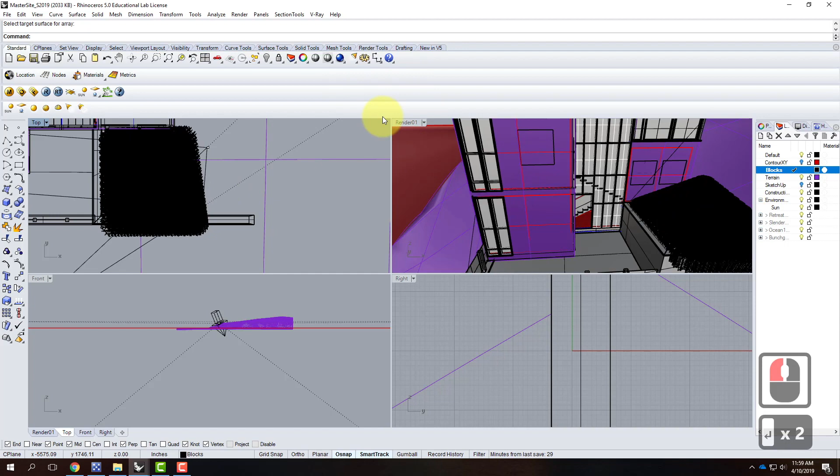Select objects to array, there we go. Select base point, there. Normal. Select surface for array, there. U and V, there we go. If we look at it, there's a bunch of those intersecting pieces.

I probably needed a few less of those. It's starting to get a little bit heavy. Furthermore, I'm probably going to need to go through and delete the ones in the front here so that they're out of the way.

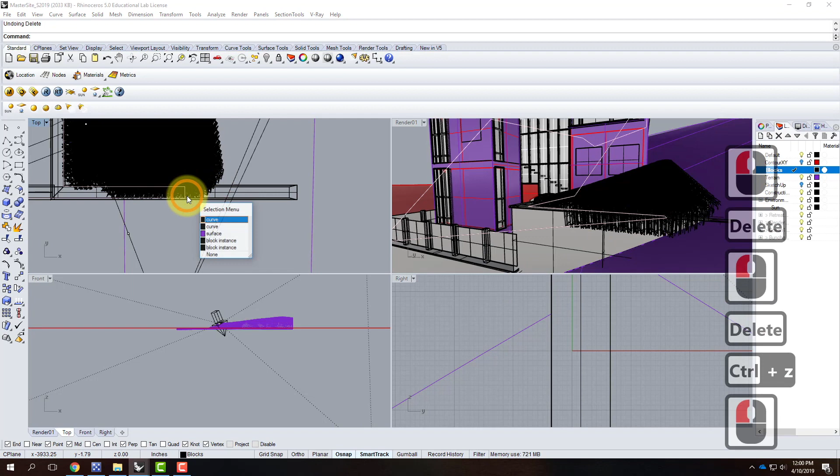Maybe I can do this better in the top view. I mean, not select my terrain there—not the building either. So the problem here is, you know what, I'm going to take this and hide it, and then get rid of all those.

And let me go ahead and show that again, and let me show this as render 1. There it is. So you see that I'm controlling what I'm seeing, and so all of that grass is there.

I should make sure that my grass material is correctly loaded, which it's not. So let me go ahead and replace that. Let me import the material, and it is under landscape.

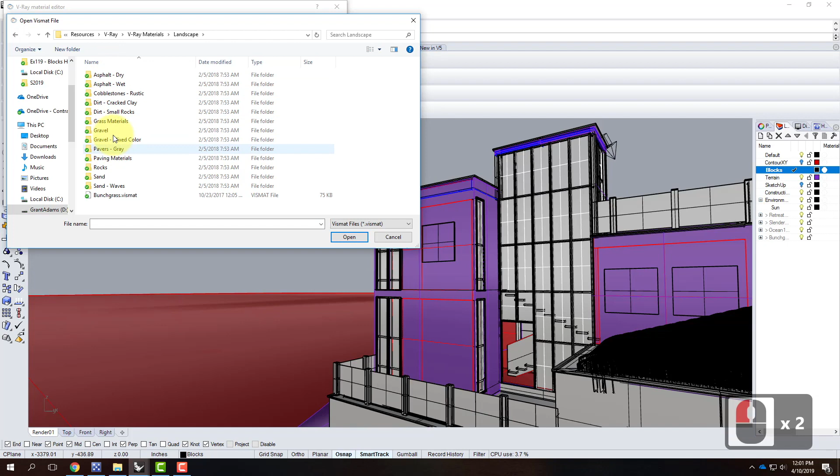I really should fix the ocean material and the bunch grass material in their blocks so that each time it loads, it loads correctly. At this point I'd have to go back and replace it each time.

That's showing up correctly, which means it'll show up in the rendering. So I've put the ocean in, I've put this in, I've put the bunch grass in.

I'm basically ready to start that first round of rendering tests. As always, it's worth doing a small render test before a big one. So I go into my V-Ray options, into output, unlock it, get the current view aspect so exactly what I see is what I get. I'll lock it, then make this much smaller, maybe 100, so I can test the settings and make sure it's good.

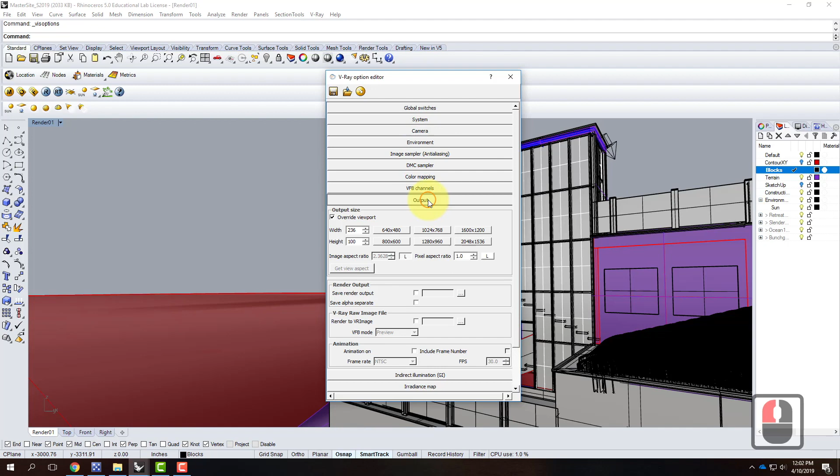Then I'll go ahead and initiate the render. Before I do that, let me save it, just because I'm getting a little nervous here. And then I can go ahead and do the render and test that one out.

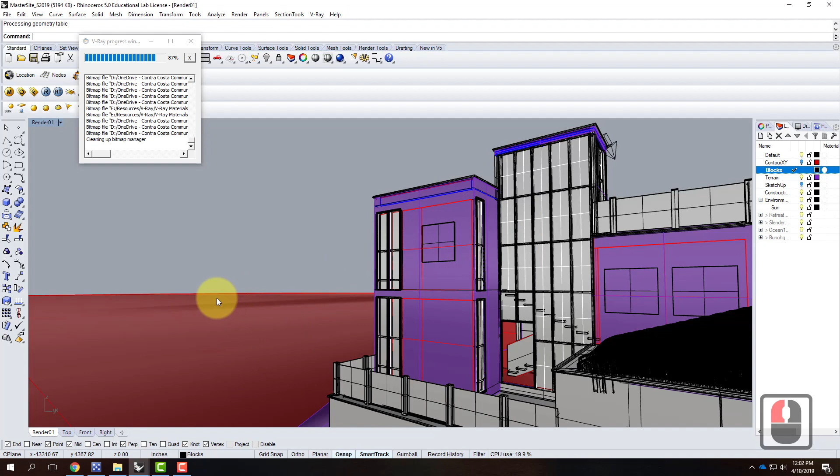So I'm not sure what this shadow is. I have to go back and double check why that's not showing up. It may be that I need an infinite plane underneath the ocean. I wasn't thinking I needed that, but I think I might now that I'm going back and double checking it. So let me add that V-Ray infinite plane.

But I want that infinite plane to be down below the ocean, so we'll put it about like there. And this is why you do those small test renders, because you find those problems before.

Now it's all black. So I'm going to have to figure out something's going wrong there, and I'll sort out what's wrong with it. Again, you do the small test render to see how it plays out.

So that's the scope of what we're trying to do. I'm not feeling like all of you are going to get there today, and that's okay. But you should get to a point where you can bring your building in, even if it's unresolved. Basically I could see yours there, and there's still design work to be done, but you could bring that into the site and test it out, see how it fits, and make some modifications. So you can still do large parts of what we're trying to do today and keep working on that file and update it, as an example.

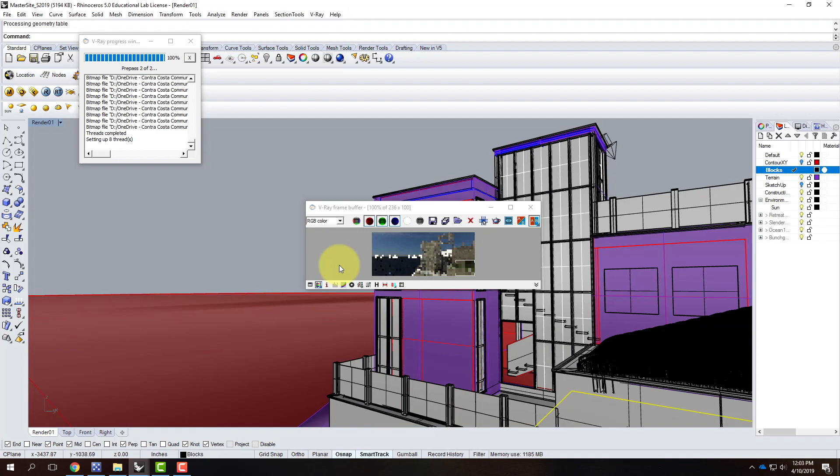So anyway, I'm going to come back and figure out what's wrong with that. In the meantime, for those of you doing the Tahoe site file, I'm going to do some work on that so you can see it in parallel. I apologize that I did it in this order; maybe next class I'll flip it and do the Tahoe site first. But I figure it might as well go through and show you that part too, even though it'll keep me talking a little longer. So if you feel like you're done and don't want to listen to me anymore, just start working, that's okay. But for those who want to see me work on the Tahoe file, I'll do it really quick.

So here we are, brand new Rhino file. This time, instead of bringing the original site file in, that's the SketchUp, and working with the SketchUp file, I'm going to go to the resources and find the actual Tahoe file, because there are two pieces in the Tahoe file.

There we go. This updated Tahoe block includes the Tahoe site 3DM, which will be used as your master site file, and the Tahoe block 3DM, which is the base. Let me double check here — there's two files to help you organize it a little bit.

So there we go. I have Tahoe block and Tahoe site. The Tahoe site is the smaller one — that's the one you use as your master site. The Tahoe block is what you'll bring in that has Lake Tahoe and all the surrounding mountains and whatever. So let me go ahead and open that Tahoe site file.

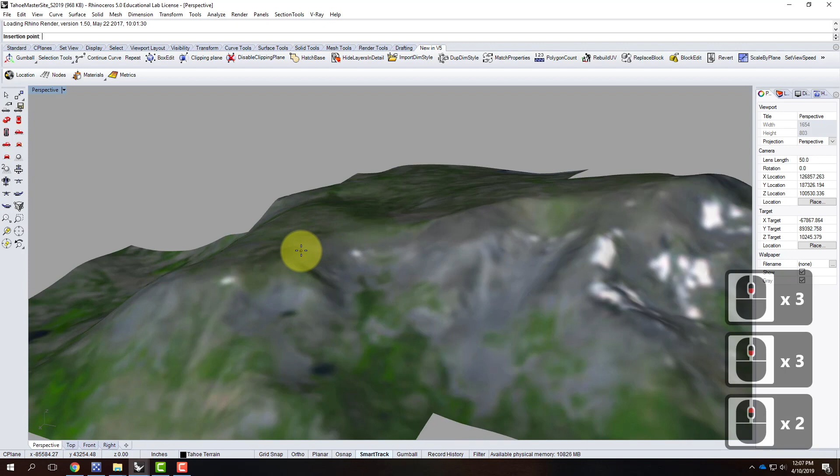I'm going to link it as a reference. Say OK. And I will drop that in. You can see that it's very, very small, so we'll drop it in maybe about there.

I need to move it so that it ends up being vertical. Actually, I should probably look at this in the top view because that might not have been the right place. So I'll look at it here. Yeah, it's definitely not in the right place. Let me go into my rendered view.

And then I need to move this so that's right about there. And then I need to move it vertically. Zoom selected. Oh, it's a little high, so we'll move it vertically, and we'll drop it down.

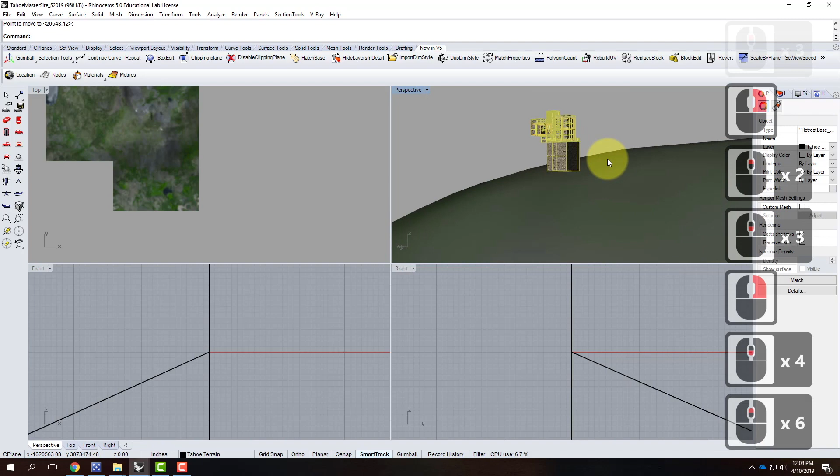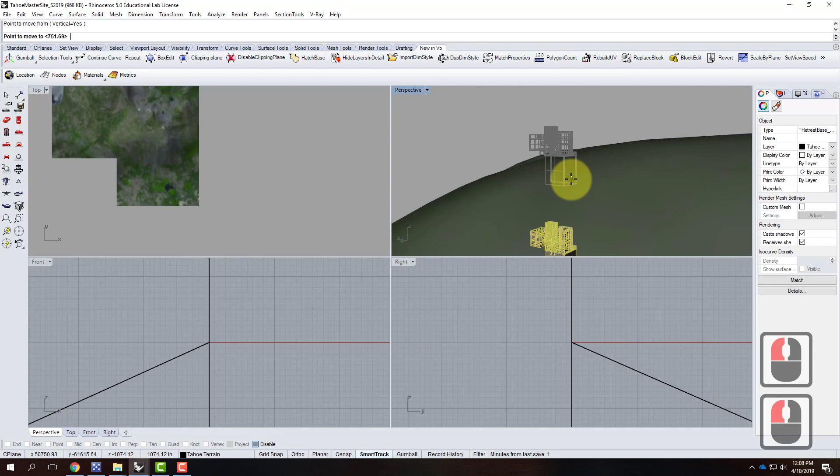I'm going to turn off my snaps here. There we go. I'm starting to see it against the hillside here. We'll move it down a little bit more. Oh, it also looks like it may need to be rotated a bit, so let me take it and rotate it.

I'm going to turn back on my snaps. And we'll rotate it like that. And we're getting close to where it fits. So this probably needs to go down just a little bit more so that that actually sticks in.

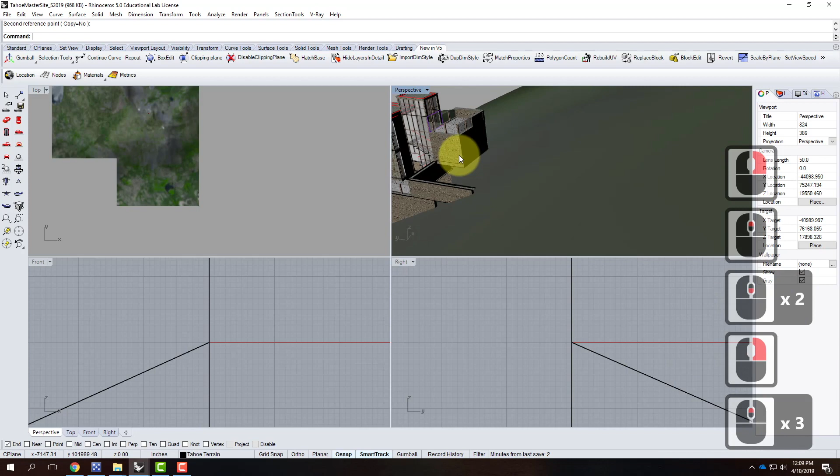So we'll go to Move. I'm going to move it back this way a little bit. And that's starting to look OK. I probably need to spend a little bit more time, but I don't want you guys to have to just keep watching me.

I would do the same strategy for this integration, where I make sure that the hillside matches up. And this placement isn't quite right because you can see that the hill actually goes under this back part of the building. But once I'm at that place, we have this bit of hillside.

But then we might want to bring in the rest of Tahoe. And I'm doing that as a block because it's such a big file. So I go into Edit, Blocks, and then Insert Block Instance. And I need to go find that Tahoe site file.

And I actually need to copy it from here into my flash drive. So let me go here. Let me go ahead and paste that in.

There it is. There's the Tahoe block. So there's the Tahoe block. We'll go ahead and open that. We'll say OK, it's a link as a reference. We'll go ahead and say OK.

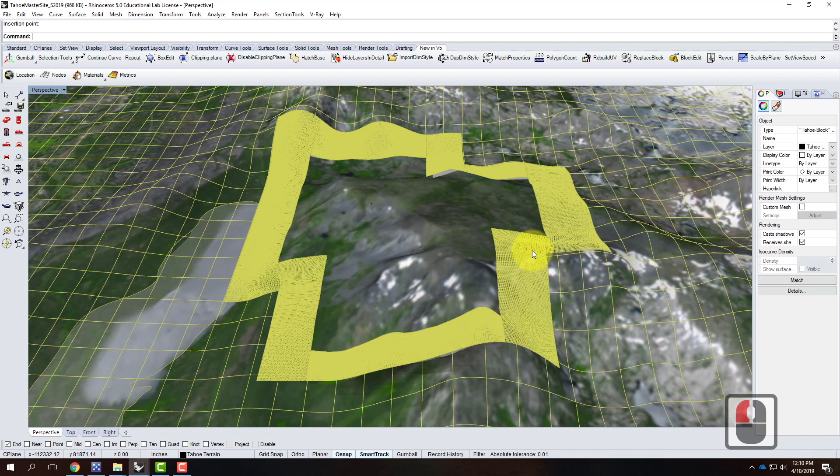And we need to make sure that those guys line up. So let me go ahead and move this so that those two points come together. And there it is, you can see it lining up. And you can see how big the file is. But this is to make your life a little bit easier.

And it will help when you go and do your renderings, especially your interior renderings. So let me zoom select it on the building itself. And as we flip around here, there you can see the mountains in Tahoe and all of that sort of thing out to the sides.

So that's how you would get the site file for Tahoe if you were working on the Tahoe site file. Of course, you could also collage in pictures, which is a whole lot easier than trying to set up the renderings this way, but I have to make it so that you guys can have even treatment whether you're doing the coast view or the non-coast view.

Okay, so I don't want to keep talking. I wanted to at least get you through this part of the integration. All the rest of the steps are the same - the rocks, the grass, that sort of thing. You'd set up your view the same way, etc. I didn't actually put the rock into the grass, but I think it's fairly obvious - you bring it in as a block, and then you can put that in as well.

So remember, all I want you to do is get to the point where you have your building into the site, even if your building isn't done, even if you don't have materials on it, and give me something to show me that you worked today. If it doesn't have materials, just do a screenshot of it. Just something. But this is the direction we're all going.